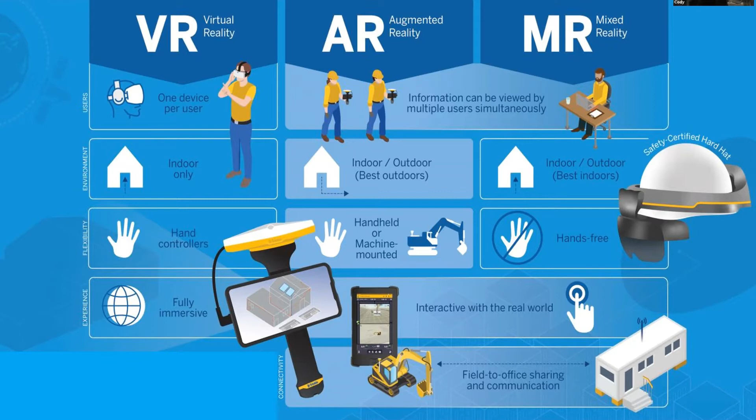All right, so first I want to start off with what a CUBE is, what I've been building. It's more of a shared virtual environment, and it's open to all the different realities within a room that's typically about 20 by 20 by about 13 feet tall, with movie screen walls where we're projecting onto the walls, and a group of people are able to be in that shared virtual environment, not have to wear the headsets, which is great in today's social distancing environment. So we're able to have a handful of people that are 6 feet apart, not touching anything, just standing in that virtual environment, sharing that space, and seeing a near one-to-one human scale 3D walkthrough of the built environment.

So CUBE stands for Collaborative Ultimate Building Environment. Again, the hardware and software is versatile. So what I've done is open it up to where instead of having sort of a cave experience, the cave automatic virtual environment of just 3D content where it's one-to-one and you have 3D content jumping out at you, you're now able to throw Revit up on the wall or Forge or Unreal on one wall and have sort of what we like to call a command center, Tony Stark style, where multiple people are seeing all this different content come through.

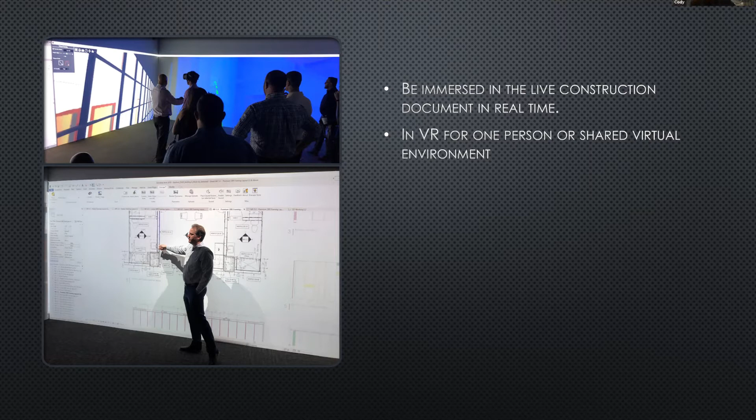The next image down shows a senior architect walking up to the wall and interacting with Revit, which he would never normally interact with as a BIM tool—he's a design architect and pushes construction document creation, drafting, and 3D model making off to other teams. But he does understand the construction documentation, those floor plans, and he's touching and selecting, driving the actual collaboration meeting in a tool he'd never otherwise be capable of using.

Also, the point of the cube being so flexible is that teams can use the tools of the trade, such as StructionSite, Revit, Unreal Engine, Fuser—you name it. If it's in Windows 10, you're going to be able to pull it up on this huge 40-foot screen. It's like the IMAX for the construction job, the construction project.

And if they know how to use it, they're going to be able to grab the mouse and keyboard and go to town, which is really good because the problem with VR, AR, and mixed reality is there's a learning curve end users have to jump into. They may know their project and content, but not the interaction—though they typically know how to use a mouse and keyboard. If they get that interaction, it's conducive to coordination meetings flowing quickly, with everyone actually seeing things at scale, what's going on out in the construction site in real time, whether that cube's just off the site or in an office elsewhere.

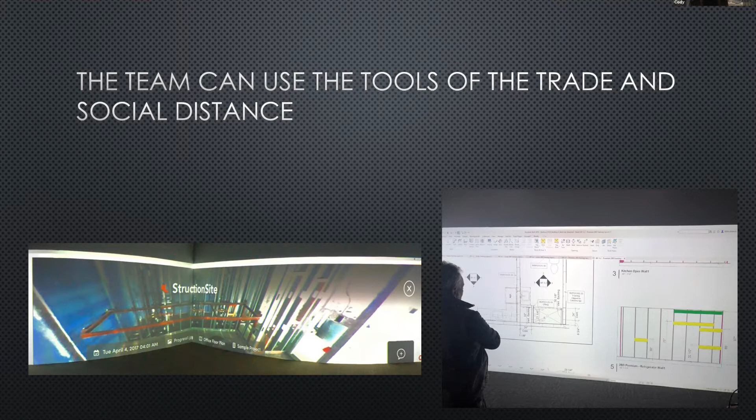So, very powerful tool. With that, I'm going to show you a quick video that describes one of my clients up in Seattle, MacDonald-Miller, that we were able to get this cube up and running for a couple years ago, and they haven't looked back since. It gives a great example of what we're building here.

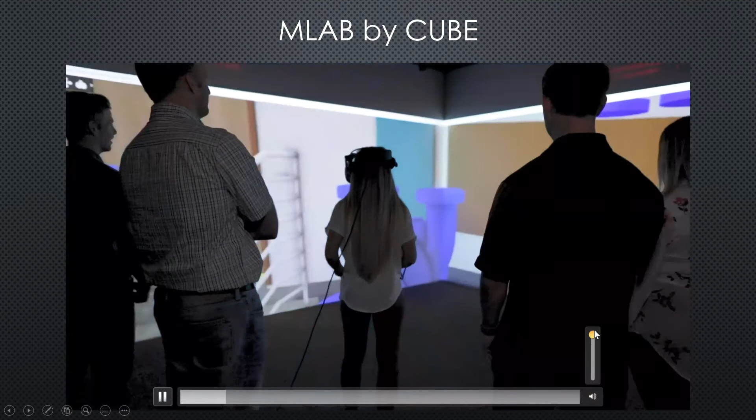There should be audio. Joseph, can you hear audio over there? I can't hear anything—okay, I'll just talk over it.

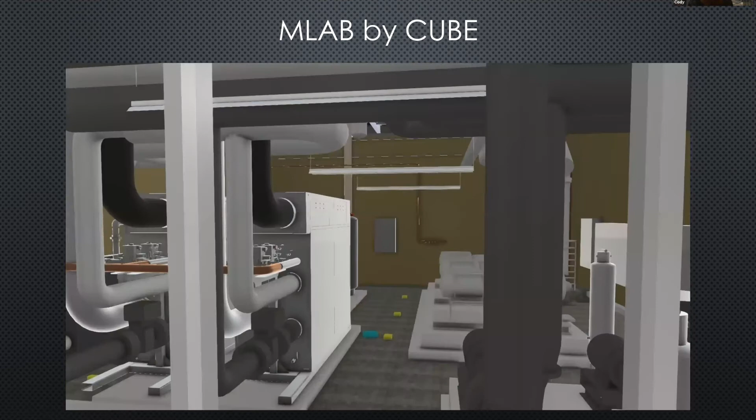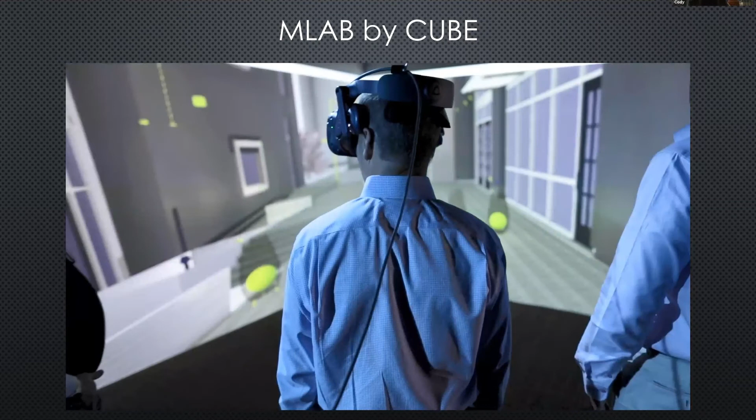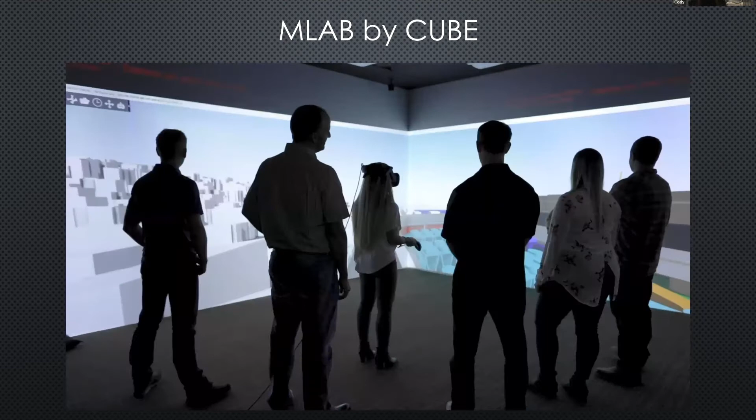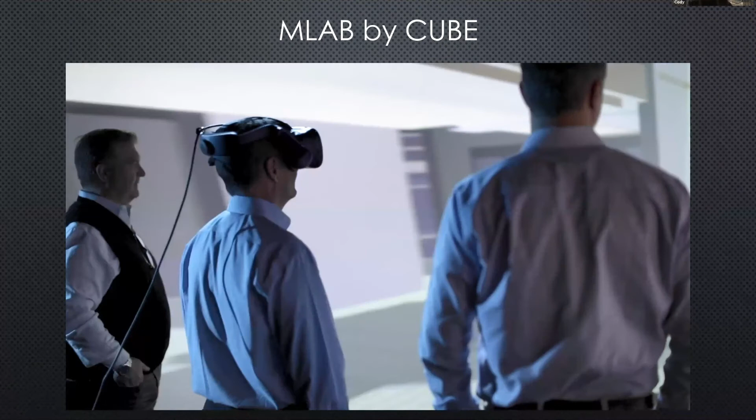We built this for the specific use case of project acquisition, and then after that acquisition, getting the teams into the cube out at their office, allowing them to coordinate and utilize the BIM models already created in different BIM tools, and experience it in VR—bringing in the owners, the end users, the decision makers, and getting them into that virtual environment in real time.

Also, a big deal is real-time rendering and real-time walkthrough, where you don't have to do the big polish I was talking about—that 90% mark in construction documentation doesn't need that high polish. Since we don't have sound, I'm going to jump to the next slide.

All right, so jumping into virtual reality in AEC. Virtual reality is more mature than any of the other technologies we've covered so far. It's a headset that, as you can see in these pictures, you put on and you're totally immersed in that one-to-one human scale virtual environment.

It's a very personal experience. However, since it is so mature, it is a much higher quality render of the content. It can be, it really depends on how much time you put into rendering out that content. So if you have a company like Epic using Unreal Engine, that is some of the highest quality rendered content that you can actually show.

I think Greg has his hand raised. Are we taking questions now, Joseph? The questions will be left until after the presentation. All right, great, thanks. Later. All right, moving on.

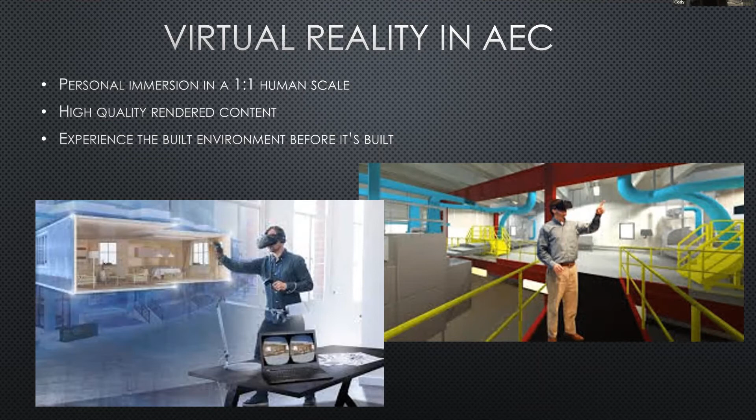So yeah, again, getting that high quality rendered content in, you're going to have to put some time in, and we'll go over the different types here. So, virtual reality - there's multiple headsets that are readily available today.

You can go to Best Buy or buy on Amazon, and there's a couple of examples here. One is the outside-in tracking. Over here on the left, we have two base stations, the hand controllers, and the headset. Those two squares are actually outside of the user that has the headset on, looking in, tracking that user through the sensors - you see these little indents all over the headset on the left.

As that user's moving around in about a 3 by 3 meters squared environment, taking one step in reality is equal to one step in virtual reality - they're being tracked, and it's highly accurate, and it's tethered to a VR PC. So VR PC means virtual reality personal computer that's capable of running these high quality headsets - these professional grade headsets. So we're using these types of headsets in the cubes.

We're using them in the office where you want to be able to see bigger models, higher quality rendered content. But now there's also other headsets that are less expensive. They're not at the, about $1,500 price point for just the headset. And then you got to tack on that VR PC price, which is typically a couple thousand dollars. So it gets pretty expensive pretty quickly.

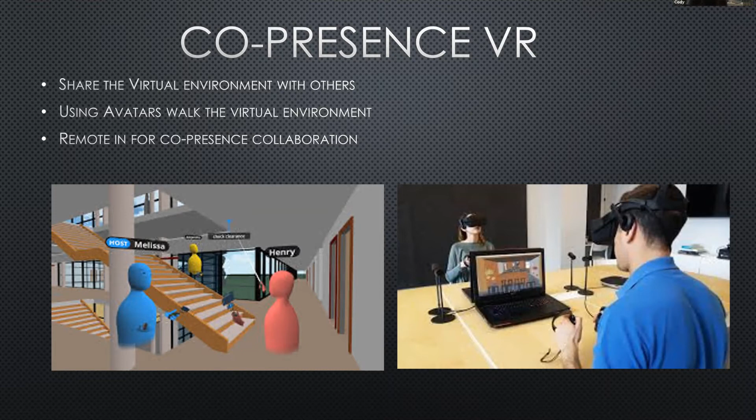So one of the big deals that I really want to share is this has been building up over the past few years - real-time rendering with bidirectional linking.

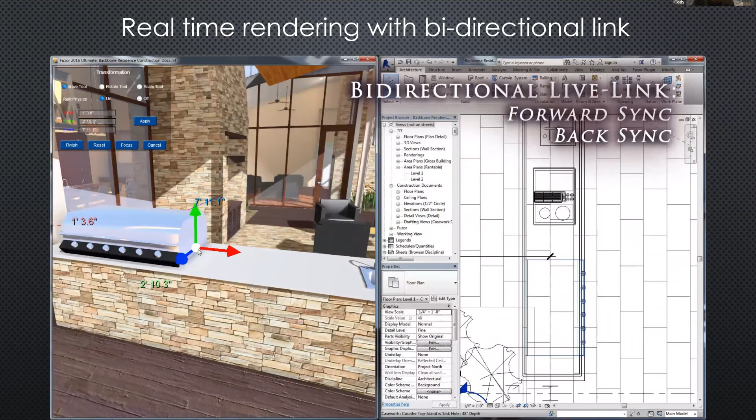So if you see in this animation, we're moving doors, and in real time in 3D, this is kind of funny, moving a grill over, you'll see over in the plan in Revit, it updates in real time, syncing it back, and it moves. Which is a really big deal. We'll play that one more time.

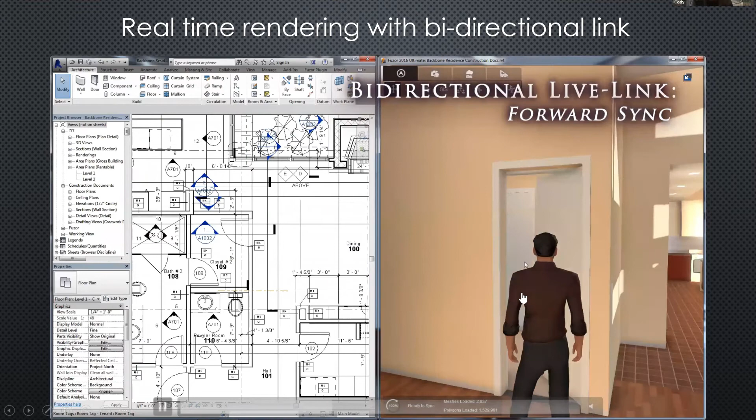So you'll see over on the right-hand side, selecting the wall, it goes to Revit, placing a door, and then right away in that real-time rendered environment, you see that door pop up. So that means you're in the software making the changes, and you see it in virtual reality. Those capabilities have only come up over the past few years, and it's pretty exciting because now you're actually doing collaboration in real time with these technologies, and it makes it so much more robust and capable and valuable at its price point.

All right, moving on to augmented reality and AEC.

So augmented reality, again, is where you have the smart devices, your smartphone, your tablets in your hand, being handheld, and you're overlaying the virtual information, virtual 3D model, and you see it on your screen.

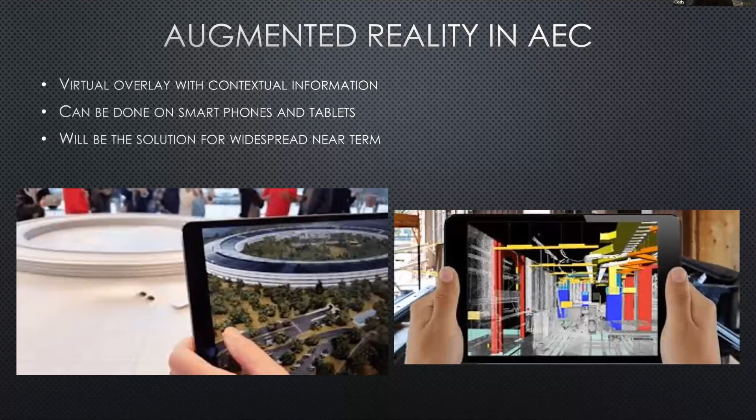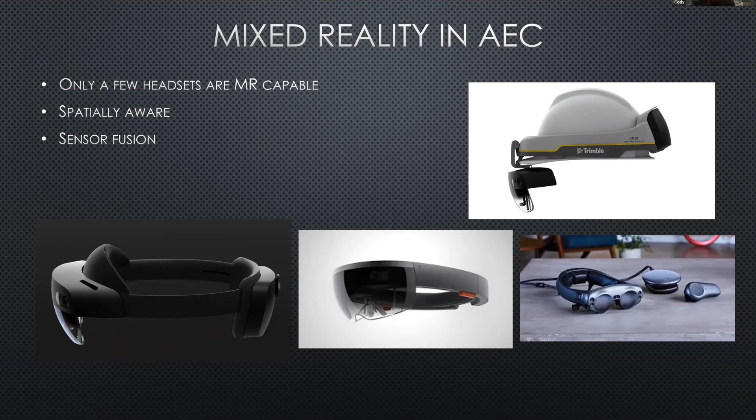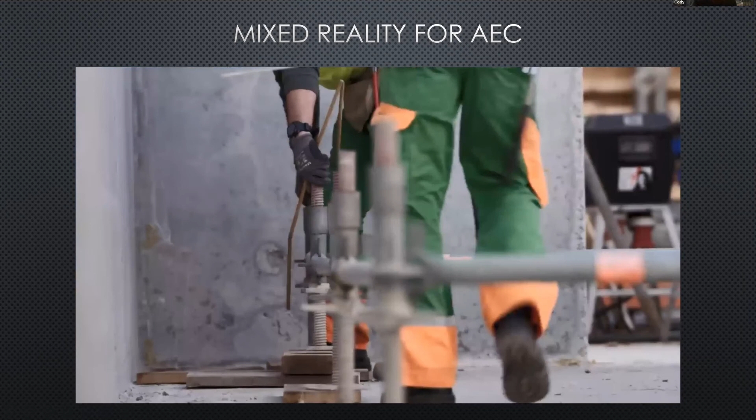All right, let's see if I have a video on the Microsoft HoloLens 2. It's kind of a sizzle video. Hopefully the audio works this time. Doesn't look like it's going to work. All right, so unfortunately it looks like our audio is not working in this presentation. So good graphics though, hopefully it's not too choppy for you guys over there. You get a good idea of what we're capable of doing with the HoloLens 2. Some of it is eye candy, meaning what you're seeing is not exactly what is capable.

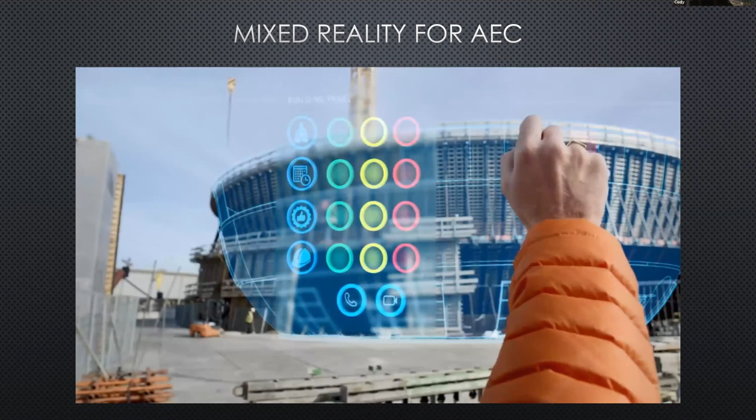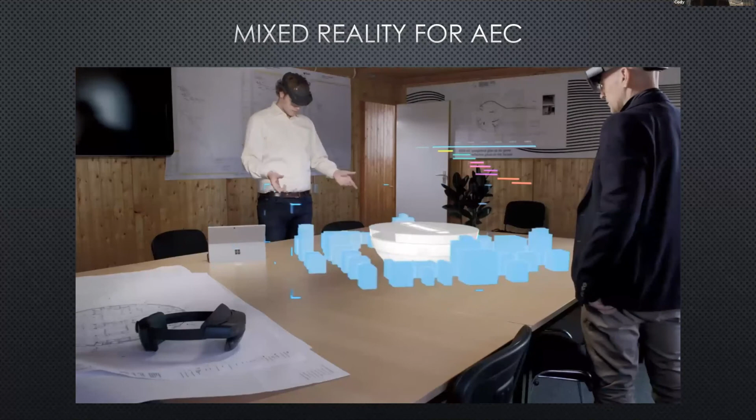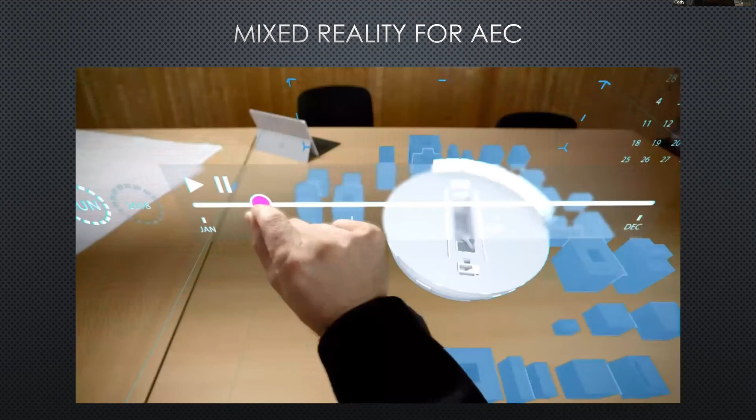So here they're showing sort of that augmented reality where you have your tablets capable of overlaying 3D content, but this is the next generation, the next steps of mixed reality. So you can have it in your boardroom, office room, and see that content on the table like this, shrink down the model to a scale that's appropriate, and then scale it up if you want to zoom into a certain location, and go through different design options. Really powerful stuff, because before you had to go to a computer screen or a projector to see this, and it wasn't as immersive or intuitive. Being able to look at the construction schedule on the fly and apply it through mixed reality is pretty powerful as well.

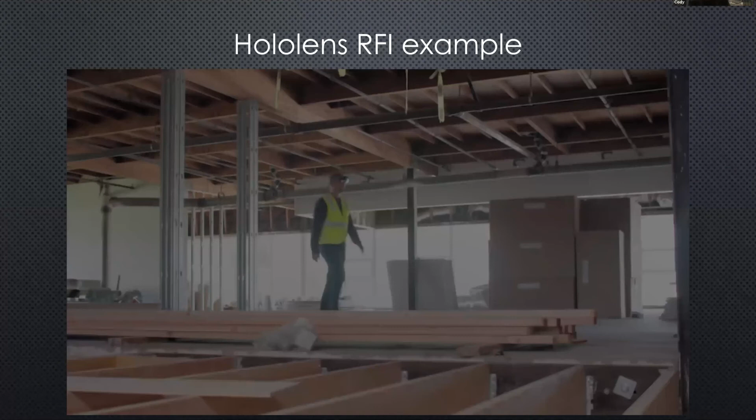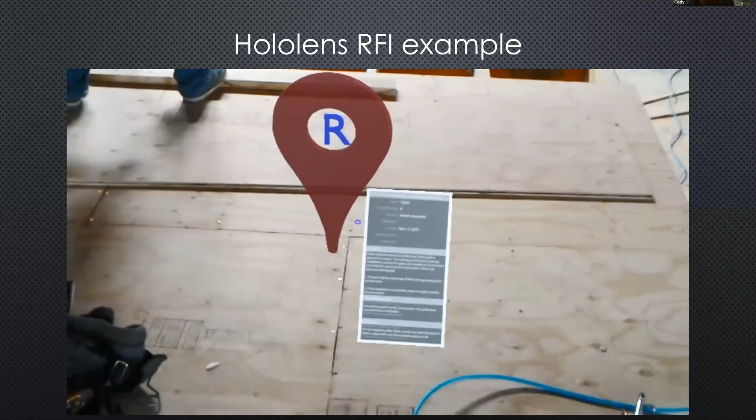All right, we'll move on from that. Here's a good example, and this is just more of a proof of concept, and it doesn't look like the audio is working on this either. But this guy's going through with a HoloLens 1 and placing RFIs coming from a construction management software, and he's actually out on the job site. So this guy comes through and he's looking at the RFIs that have been placed spatially around the job site, and now he's going to reply to that RFI.

I'm not aware of any mixed reality out there that's at scale to go across construction sites at this point, but this is where we could be in the near future. I'm sure there are companies out there working on this kind of content, but it's pretty exciting because you can imagine overlaying your content from your construction management software and being able to instantly know where the reference points are in the spatial environment.

In comparison to having to know how to read construction documentation and figure out where it is in the actual construction site - that's how a lot of problems arise, people don't understand, or even if they're seasoned, they make mistakes and think that an RFI or a certain location is at another location. If we get to the point where we can get mixed reality to be localized in the right location automatically, that's going to cut out a lot of user error.

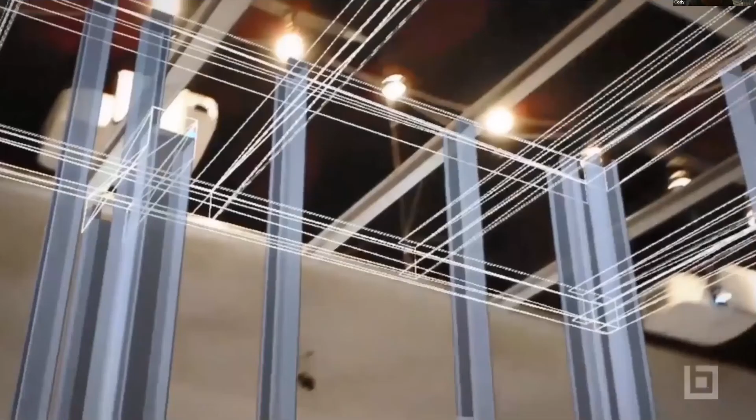All right, so jumping into a few proof of concepts that I've created over the years. This is me with the HoloLens on my head a couple years ago on a job site in downtown LA. I've been doing this for quite a few years, actually going out on site and utilizing this technology. So this is a proof of concept video where we did a proof of concept in a controlled environment, and what you're seeing is actually a bathroom pod that was typically prefabbed off site and then flown into the construction site.

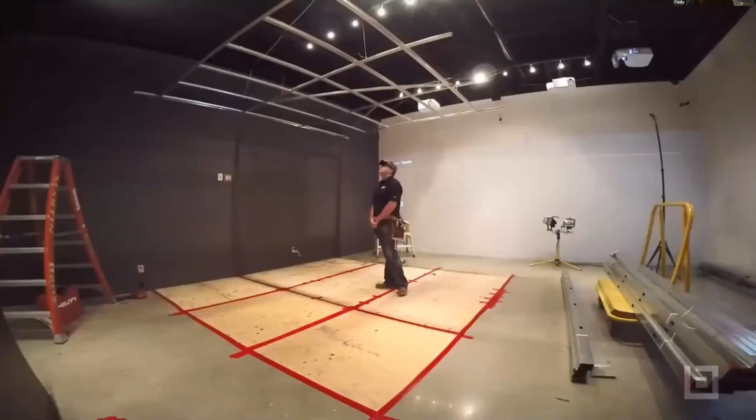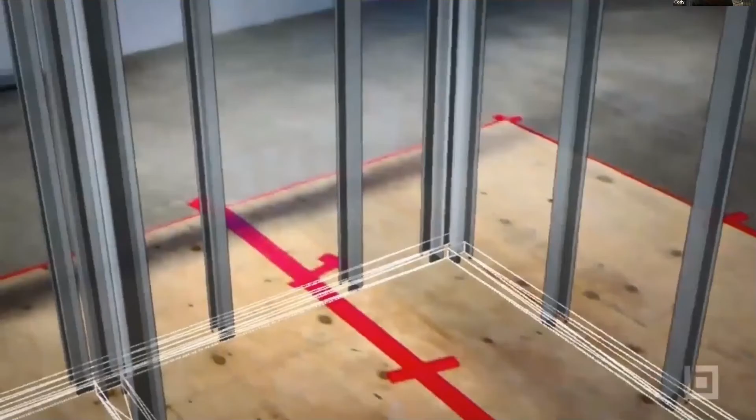So the proof of concept was to take that bathroom pod and break it up step by step and get it into a location where it's repeatable. So if it lost its location, we could turn it back on and get it back in the right location. So this guy's going through and laying the bottom track, then putting up studs and backing, and then the ceiling grid. And he did all this without actually using any construction documentation or tape measures.

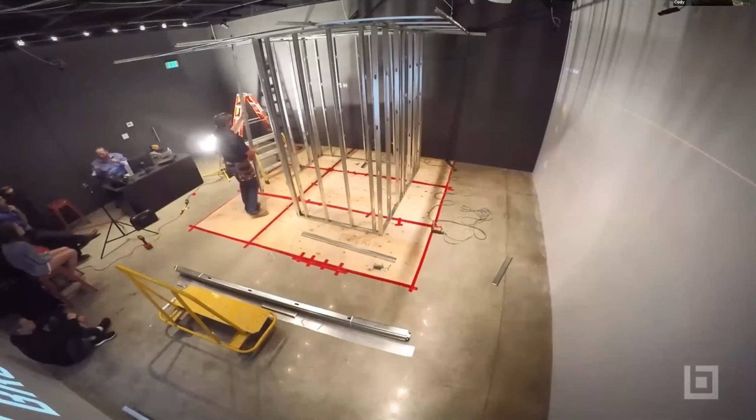So, and this was with the HoloLens 1. So it's definitely doable. We did the proof of concept and proved that the device is capable of doing this.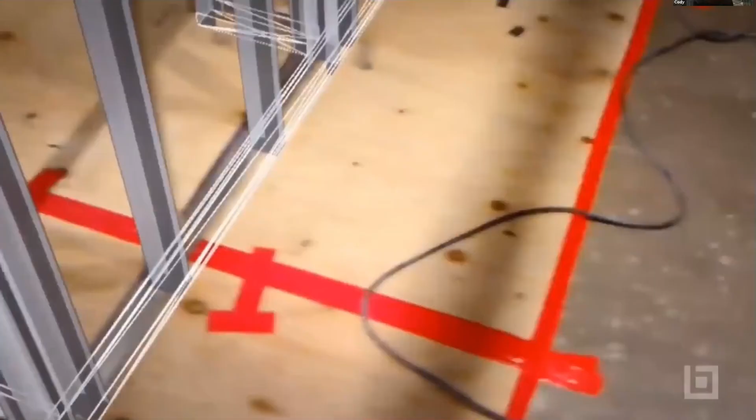So it's pretty exciting to think of the opportunities in the near future of what we could potentially do with HoloLens 2. This video is actually overlaid on top of the track and stud, so it gives you an idea of how accurate that was.

We did a side-by-side of traditional construction versus mixed reality construction. Traditional means construction documentation, while mixed reality comes straight from the BIM model with no tape measure. We did another proof of concept, and I'll share that with you and show you the results: traditional framing versus augmented framing.

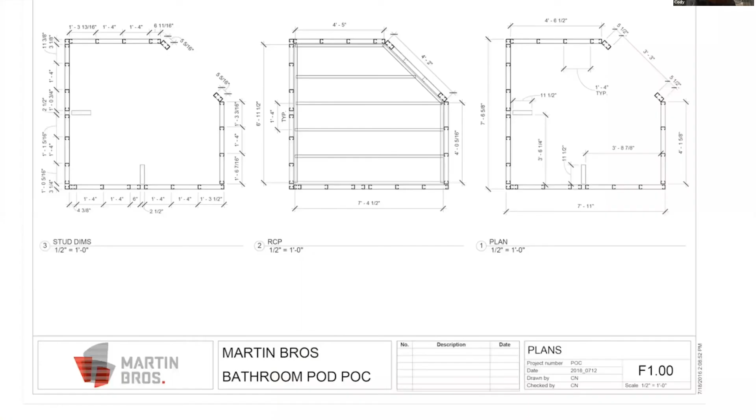So here would be the construction documentation of that bathroom pod, and it's just going through showing what it looks like in 3D.

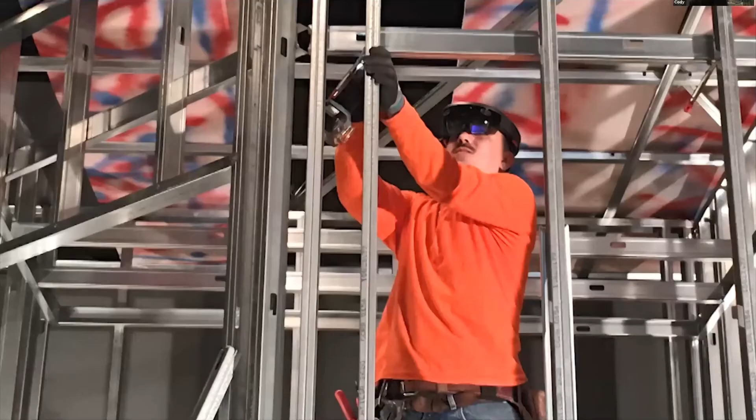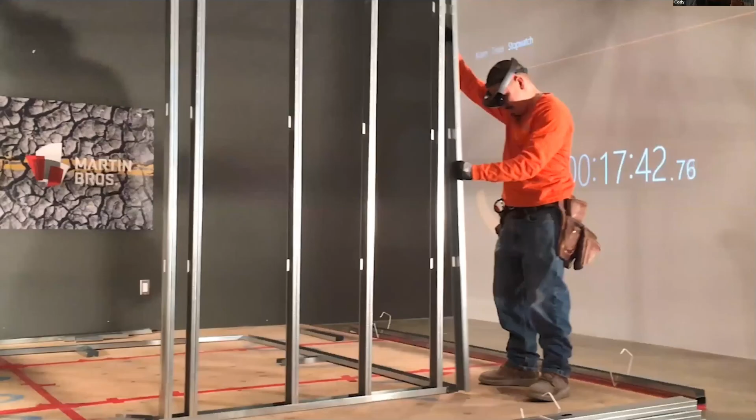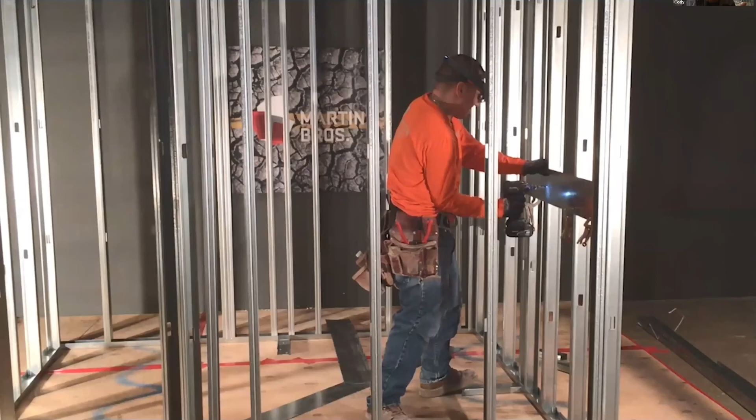This guy was the fastest framer from this company, and we brought him in for this time trial and put a GoPro at multiple angles. You can see this is what he sees, the top track. There were GoPros at multiple angles, and what we did was have him come in and build a bathroom pod by himself with a clock going in the background.

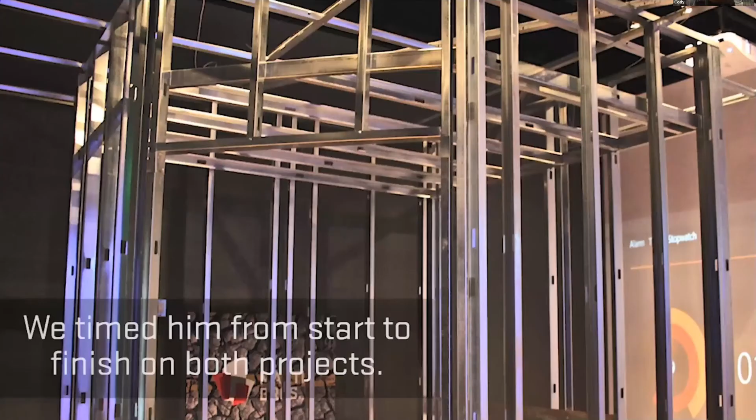We had him do it in traditional means first, and then had him come in a few months later and do it with a HoloLens mixed reality. We had those GoPros going then, and chopped it up into 5-minute segments, with a clock in the background to keep us honest.

This gives you an idea of how much quicker he was able to do it. On the left is augmented reality, on the right is traditional means. 15 minutes in, he's already on top track with mixed reality, while he's still on bottom track with traditional means 15 minutes in.

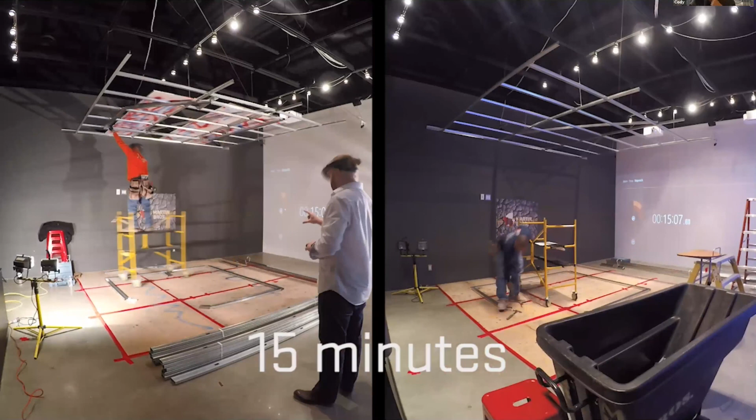Already putting up studs 20 minutes in with mixed reality, he's still looking at construction documentation and putting down bottom track at 25 minutes in with traditional means. Finally, 30 minutes in with traditional construction, he's up putting up top track, while he's almost done placing all the studs 35 minutes in with mixed reality.

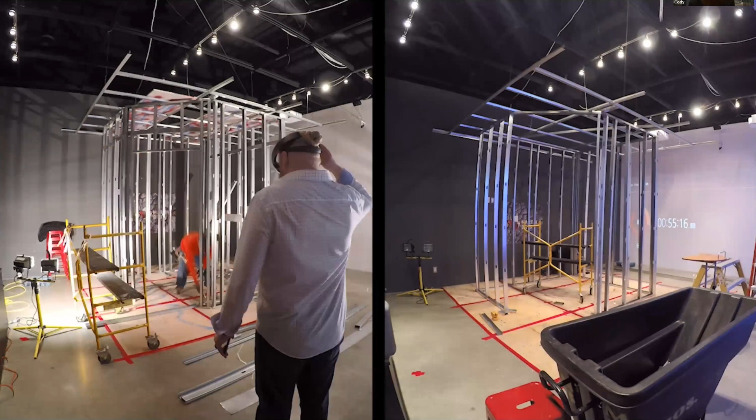Finally putting up those studs 45 minutes in with traditional means. 50 minutes in he's placing the backing, 55 minutes in, and moving on already before an hour in, putting up the ceiling grid with mixed reality construction layout.

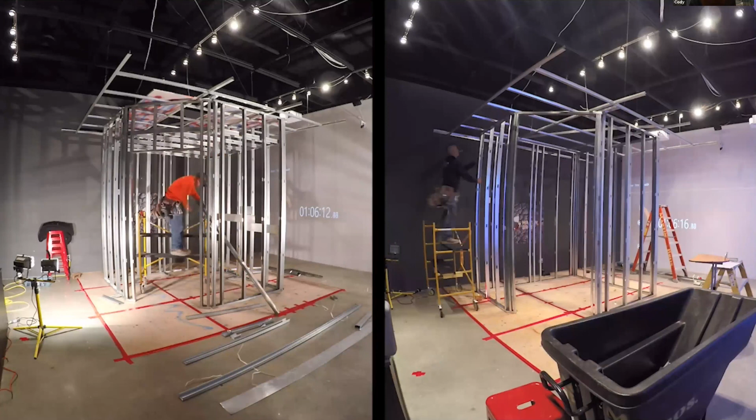An hour and 7 minutes in, he's completed his build with mixed reality construction layout, and he's still going with traditional means at an hour and 10 minutes in. Again, we have a clock projected in the background. You can see on the left-hand side, underlined, an hour and 7 minutes in over here. We're going to be about an hour and...

37 minutes in, and this is the same guy. He actually tried his best to go as fast as he could with the traditional means, and he's about over 30% faster with mixed reality. That was the first time he had ever put on mixed reality, so it was his first experience. We gave him a few minutes to understand what he was looking at, and he had 8 years with traditional means of construction, so that's pretty impressive.

He told me he thought he could go faster if there was a learning curve and it was improved, and there's got to be some companies out there doing this by now. But right now what I've seen is the majority of this is just model overlay for augmented reality and mixed reality. There are definitely exciting new platforms coming out every day. It seems like the technologies are starting to catch up with the dreams we had 10, 20 years ago, and it's something exciting to keep tuned in to see what's going on.